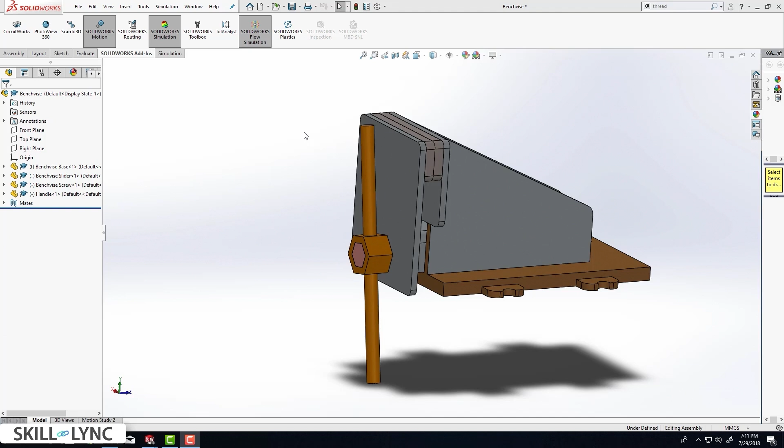In this video, we are going to assemble all the components of the bench-vise that we have been creating so far. To start, we click on File, New, select Assembly, click OK. Then click Browse and select all 4 components, starting with the bench-vise base, and click to insert it.

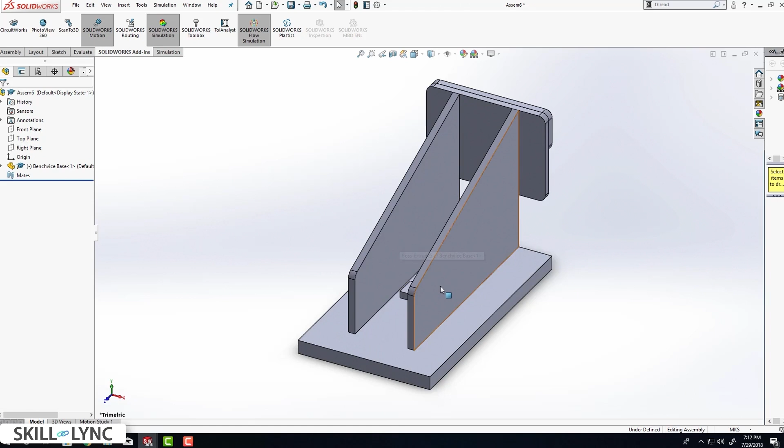As mentioned in the last video, when you insert the first component, it's going to be fixed, meaning you cannot move it. To check this, you can click on it and try to drag it, but it won't move, which is why we say it's fixed. To make it unfixed, right click and select the Float option. Now you'll be able to click, drag, or even rotate this component.

Now we go to Assembly, Insert Components, and click Browse again. This time we select the screw component of the bench-vise. What we'll do is first click on our bench-vise base and select its origin, select our assembly origin, and click on Coincident.

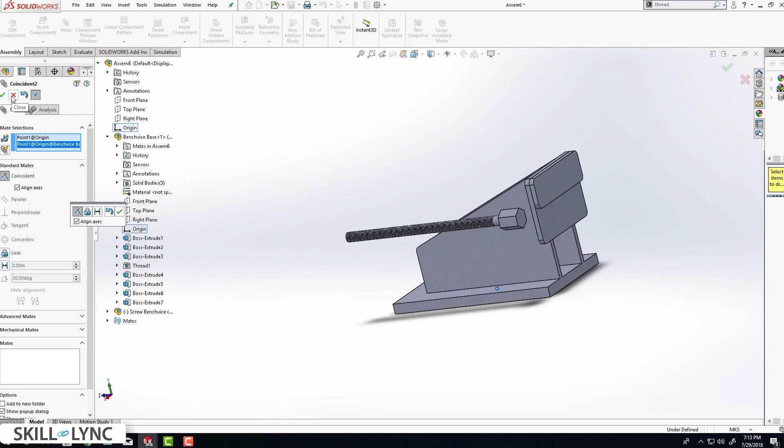There is another way to do it. You can use the Mate option and select the assembly origin and also the part origin, and do a Coincident mate. But that's just another way to do it. Since we have already done it, let's hit Close to exit this option.

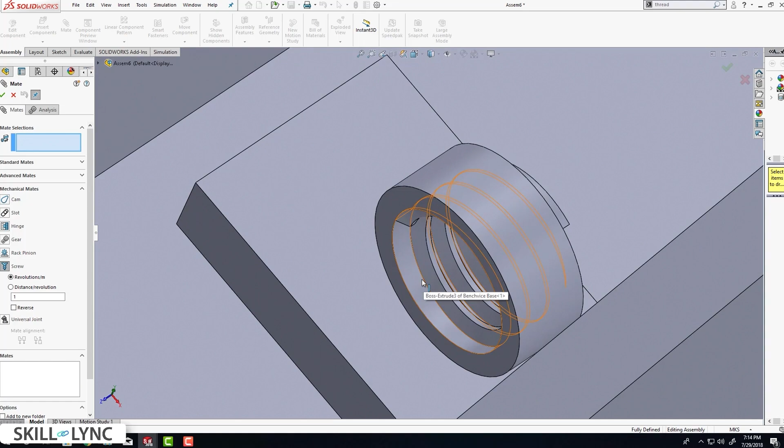Next, we want our screw to go inside the nut that we created. We go to Mate, then Mechanical Mates, and make sure all selections are cleared. Select Screw Mate and first select your faces here, the faces of your thread, and select another face on the screw. This will mate the screw and the nut perfectly.

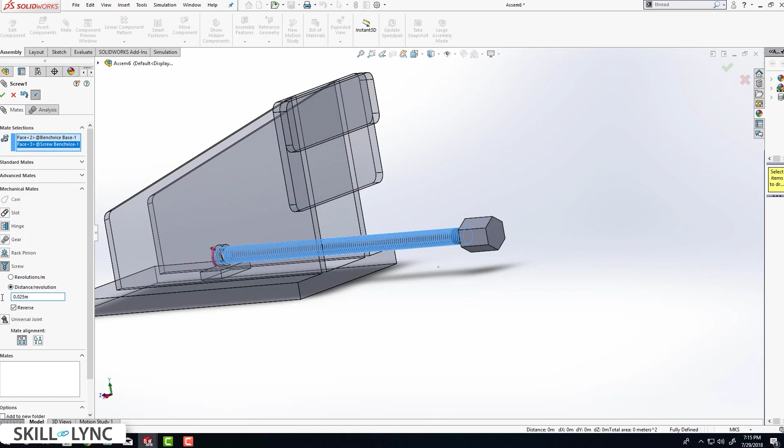So for each 360 degree rotation, it's going to travel 25 millimeters. Let's click OK for now and make sure our unit system is in millimeters so that we are consistent.

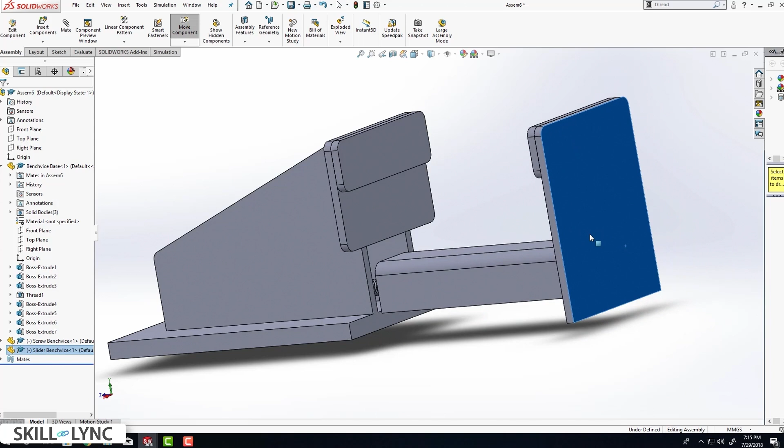Next we are going to insert the slider, which is mounted on the moving jaw. Let's select the slider and just place it somewhere. Now we are going to align this as well, since we want this to be inside our stationary component.

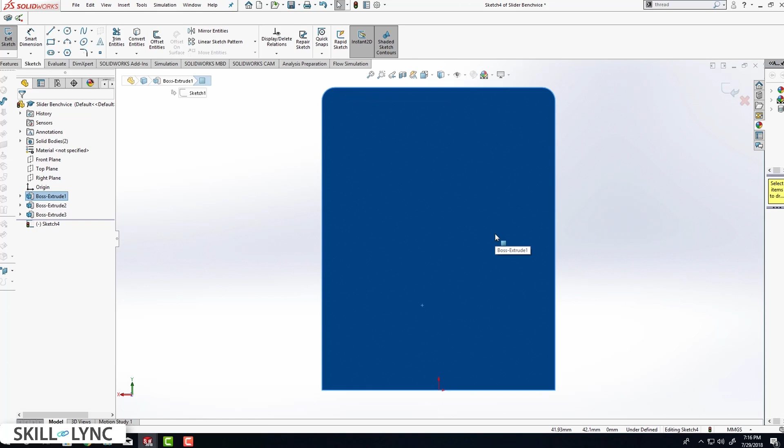One thing I forgot here is to draw a hole on our slider, so we need to create a hole first. Let's right click and click Open Part. This opens that particular part file and we are going to add a hole here. Let's select this face, create a new sketch, then hit Ctrl+8 to view it in the normal direction, and then use the circle tool and click on the face and drag it out.

Now hit escape, select the origin and the center of the circle, and apply a vertical constraint. Now we are going to use the shortcut key S to provide dimensions. Select the center and the origin and type in a value of 21.25 millimeters. Similarly, the diameter of the circle needs to be 9.5 millimeters.

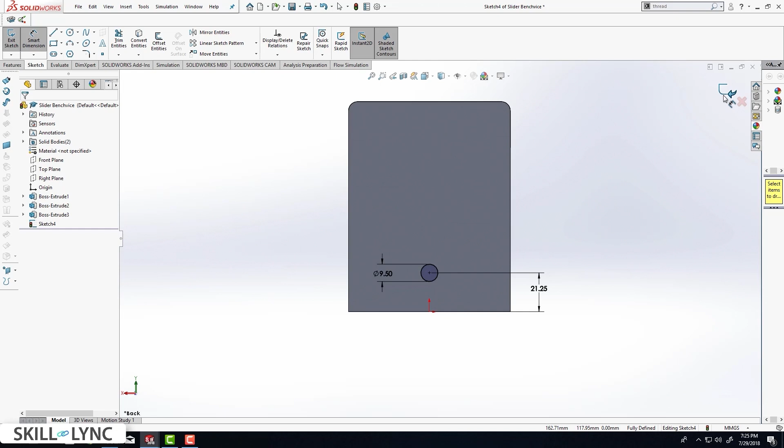So let's exit the sketch. What we are going to do now is click on the sketch and use extruded cut, typing in a value of 5 mm. We do this because we know that the thickness of that particular face or plate is 5 millimeters.

So now let us save this particular component and click on Save, because this would automatically update this particular component in the assembly. And now if you see here, you can see that our screw appears in the right location.

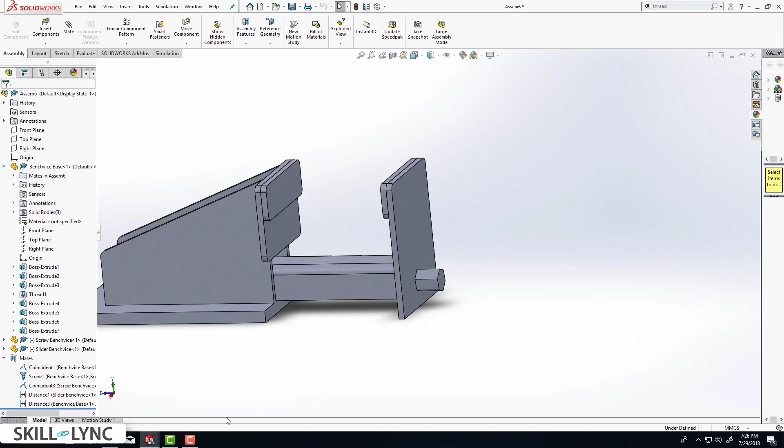Now initially your slider is not going to match exactly with the screw, so we need to create additional mates. We are going to select this particular face of the slider and provide an offset mate. So let's click on mate and select this inner face and the outer face of the slider, and provide a distance mate, or offset mate, typing in a value of 0.5 mm.

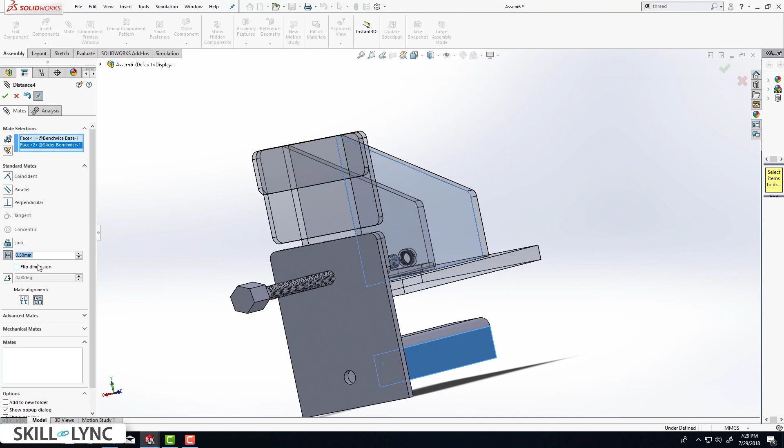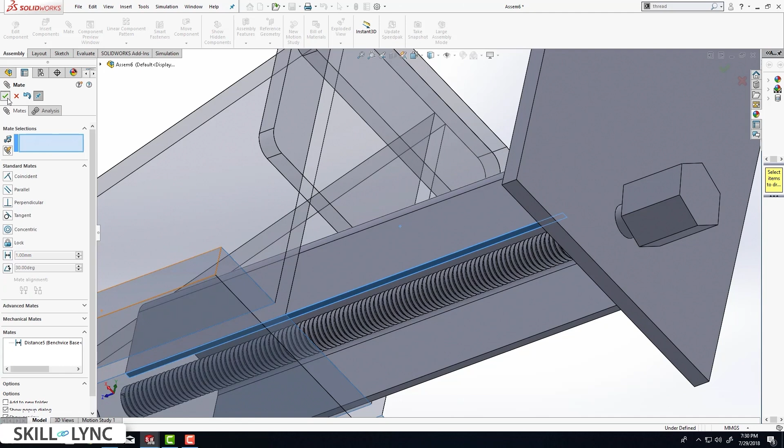This basically aligns our slider along one direction, and then we select this particular face and you can actually move it upwards. Next, we select this particular face and this particular face, and provide an offset mate again, or a distance mate, typing in a value of 0.5 millimeters. Let's click OK, and you can see that our screw and slider are moving independently. This should not happen.

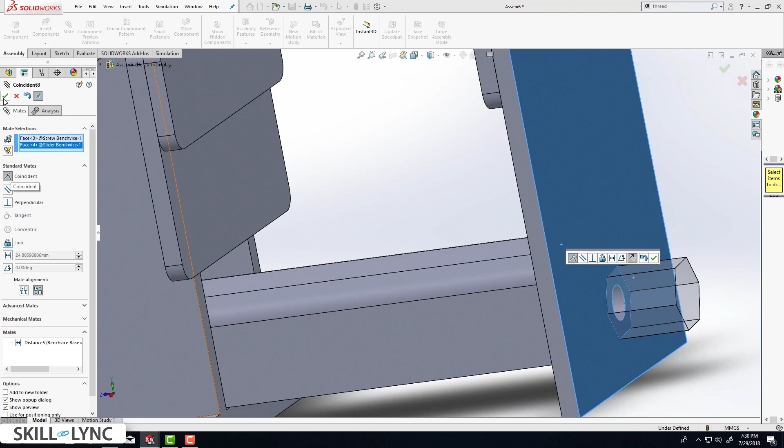So to fix this, we are going to give a coincident mate. Select this particular face, and let's select this face and this particular face. This way it's going to create a coincident mate, click OK, hit escape. Now if you try to rotate this particular screw using your mouse pointer, the slider is going to move automatically. You can check it in both directions, and you can see that we have assembled it perfectly.

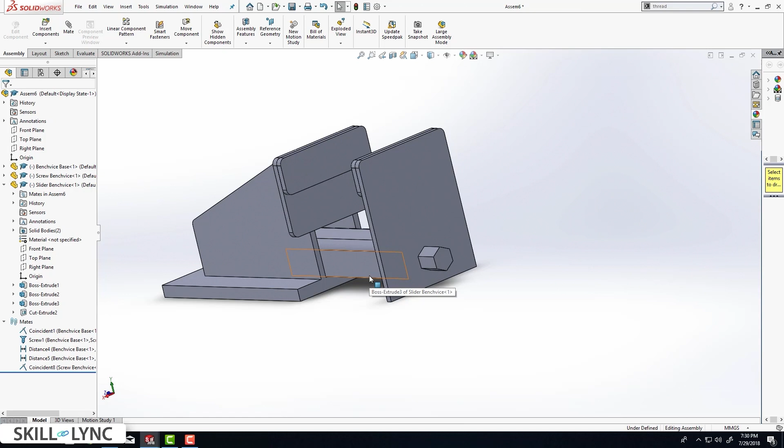The final thing that needs to be done here is to insert the handle. So we're going to click on insert component, browse, select our handle, and insert it.

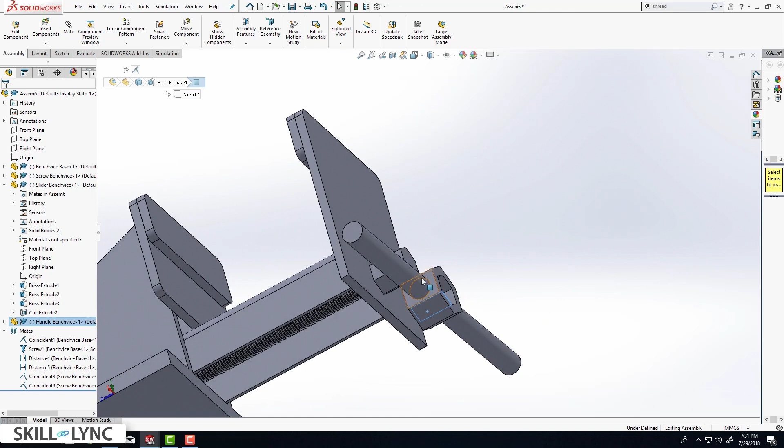We are going to select this particular face and this face, and click coincident. We select this particular face and the corresponding face on the nut, and use coincident again. Looks like that did not work. Let me select one more face, the side face and the side face here, and click coincident again. There you go. Finally we select the top faces and do coincident again to align the handle perfectly.

Now if you rotate the handle, you can see that the mechanism works perfectly. You can do it both clockwise or anti-clockwise to check this out.